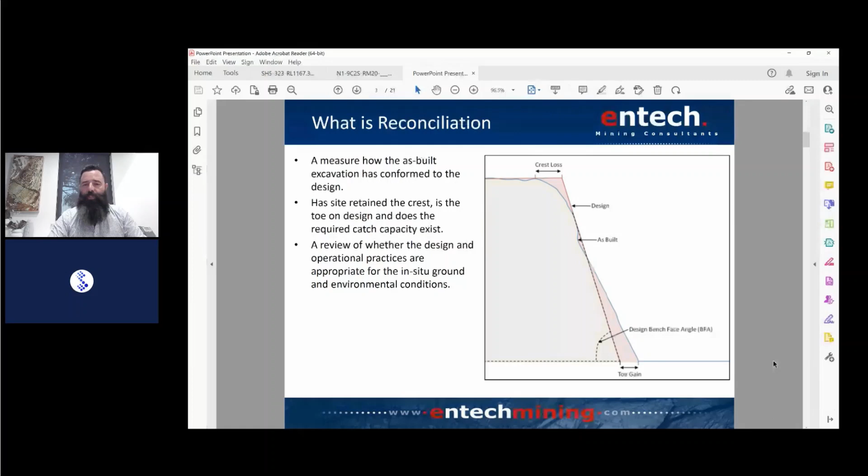Why do we complete reconciliations? So why do we bother with all this work that goes into completing excavation recons? In a generalized form, reconciliations determine if our current practice is acceptable. So from a design perspective, are our design parameters correct? And operationally, do we have the right systems and processes in place to help us achieve that design?

It's a measure to determine if site is achieving the required metrics. For open pit, we're looking at obviously crest loss, toe flare, catch capacity, bench face angle. For underground and vertical development, we're looking at our overall achieved profile, but we're also looking at quality conformance reviews of the installed ground support. So are we looking at the correct ground support installed on the correct spacing in the correct place?

Highlighting these areas of non-conformance also allows us to review the implications that this has on an operation. We can then identify and resolve the root cause and obviously fix what's going wrong and improve what we're doing going forward. So we can quantify the impact of a system, process, or change. I guess a good example of this would be drill and blast. We all know that drill and blast can and does have a significant impact on our final wall profile.

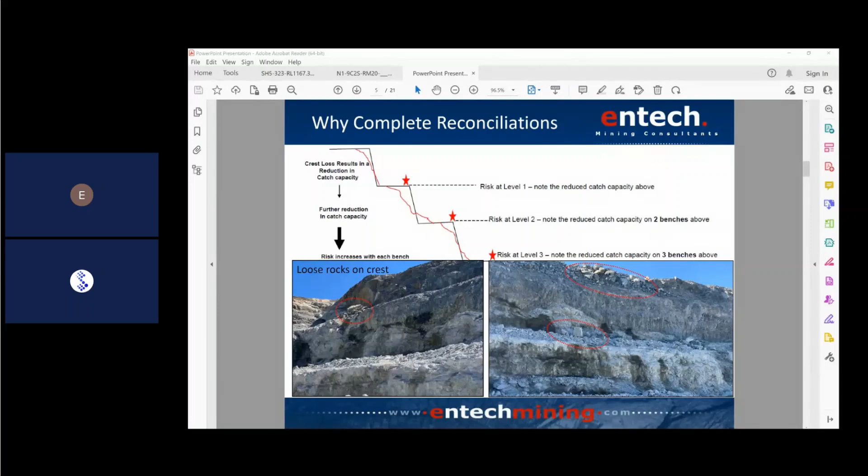So currently, where do we sit? The majority of mines nowadays, fortunately, do collect a high level of data. Unfortunately, only a small percent of this data seems to get used to its full capacity. And one of the reasons for that is actually taking that raw data and transforming it into something usable becomes quite a time-consuming process, and sites and mining operations often don't have the available manpower to dedicate to doing that.

However, when we do use this data correctly, the data will provide value-adding input into decisions and workflow based on mine sites. So the question out of all of this is, how do we get the most out of the data, and how can this inform business decisions moving forward?

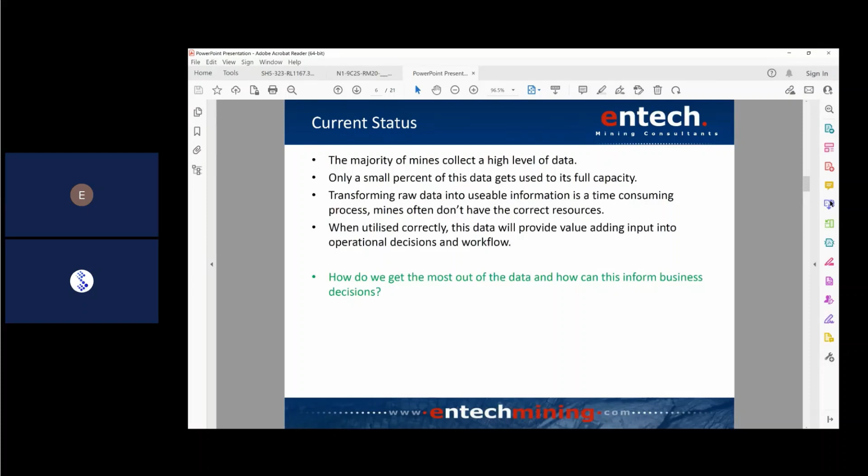Scott, just one quick logistics item. We can't see your video. I think we lost your video. If you can check. All right. No worries, Ravi.

Perfect. And it seems like it is time for poll number 1. So I am going to be releasing poll 1 if everybody can participate. The poll is, what is your current method of geometric reconciliation and pit analysis? You will see it on your screen. We'll leave the poll open for the next 30 seconds or so. Great, very interesting answers here. We'll leave it for the last 15 seconds. Still see some responses coming in. Great, so it's time to close the poll.

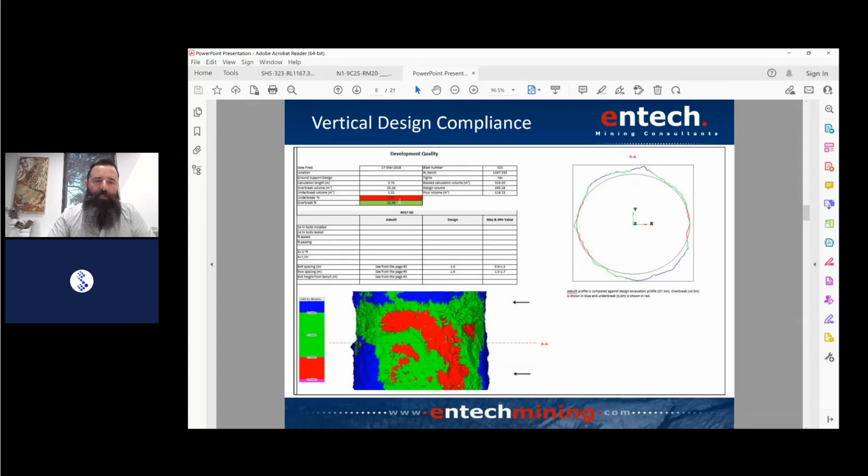So this is a conventionally sunk shaft, drill and blast methodology, and I think the diameter was 7 meters for this. Once the bench was mucked and the ground support installed, the as-built profile was scanned, and what we've measured here is volumetric overbreak as a percentage. So you can see for this section of the 7 meter diameter shaft, our volumetric overbreak was 12.36%.

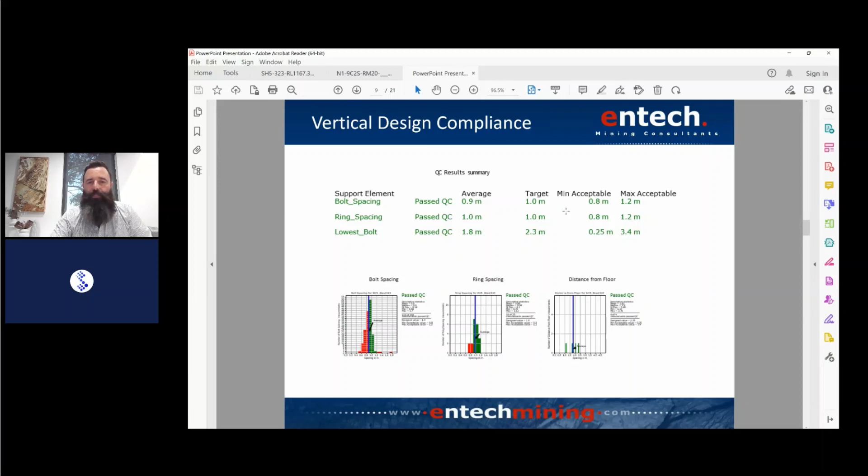And as we scanned after the ground support had been installed, it then allowed us to perform quality control on the installed ground support. So we looked at bolt spacing, ring spacing, and the height of the lowest bolt off the bench floor. We compared that to our acceptance criteria and whether it was a pass or a fail, and any actions needed to bring our design back within our criteria were taken afterwards. So we'd measure the average bolt spacing, average ring, and lowest bolt, and compare that to what we deemed acceptable.

You can see here the image from the scanner. So this has gone through and completed a calculation on every bolt spacing and then also every ring spacing.

That allowed us to continue very accurate quality control on the ground support that was installed. And over to the left-hand side of the screen, you can see an image showing the as-built shaft in comparison to the design barrel. So you can see the green and the blue indicating various levels of overbreak, and the red is obviously sitting proud of the barrel design and indicating tights within the shaft itself.

So I guess one of the important things to consider here is that not only is the actual data collection and the data processing important, but the way in which we convey this information through to operations, tech services, and management is also equally as important. We can collect all the data that we want, but unless we can effectively convey that information, it's not going to get us very far, and it's not going to help us convey the message we want to get across there. I'll just change tabs here, so you should be able to see a change.

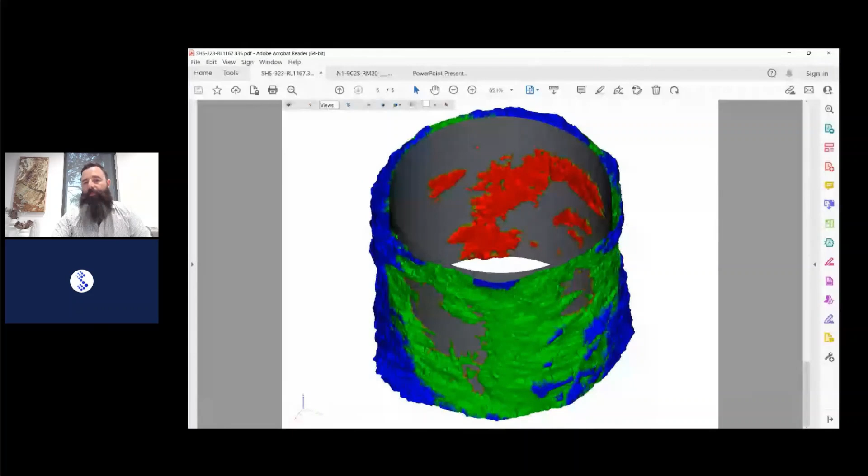Now, part of what we included in our presentations or our reports was a 3D image of the actual shaft profile in comparison to the design. And again, this goes a long way in the actual end user being able to view the data, being able to see that reconciliation in comparison to the design and seeing where we get our overbreak, where we get our tights. As most of you know, with shafts, tights can be more problematic than overbreak a lot of the times, especially if we're wanting to lower steel cans down afterwards.

So this was quite well received, and the fact that people could actually get their head around when we say, right, we have 12.5% volumetric overbreak, what does that physically look like? You know, people can begin to gauge and see in their minds what overbreak looks like.

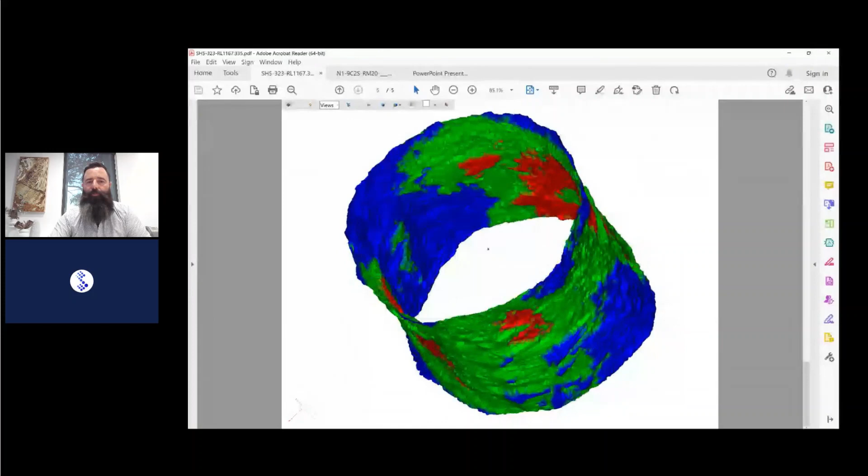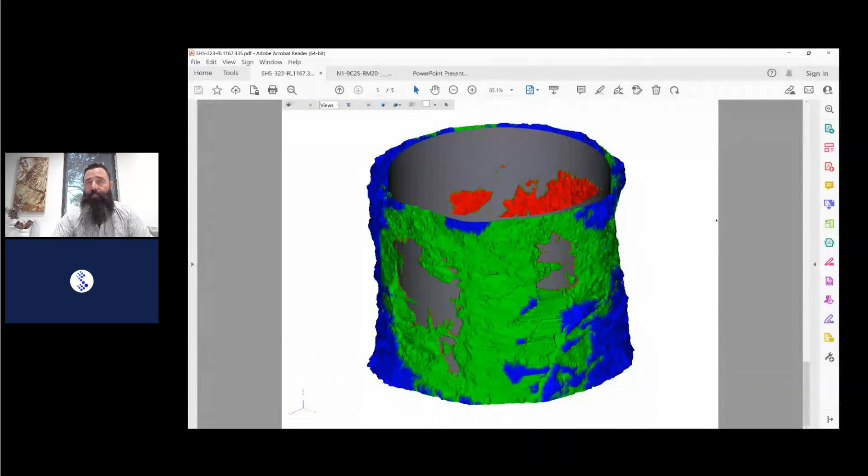Obviously, when we're looking at long-term trends here, we'd overlay this with various lithology or structural intersections. So if we're beginning to see large areas of overbreak, can we also tie this into a change in lithology, a large-scale fault or shear zone coming through, or has there been a change to the drill and blast practices? Is that why we're suddenly seeing tights on the northeast wall?

Stepping back to the original presentation. But the same style of data collection and report processing for underground design compliance. So obviously once we've bogged the heading and scaled, we would go down and complete a scan of that face. Now, one important thing to note here is that not only do we scan the heading as it is, but that scan also picks up the previous heading. So we pick up the exposed face, and then we pick up the ground support that's been installed, so the mesh, bolts and fibercrete behind us.

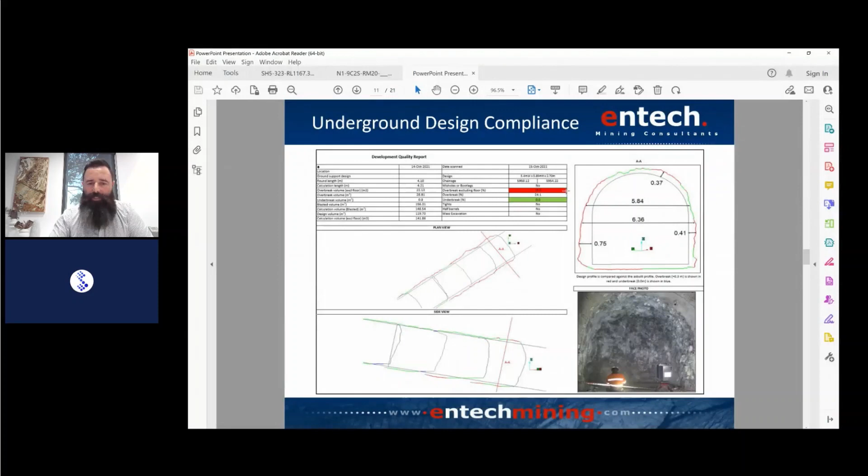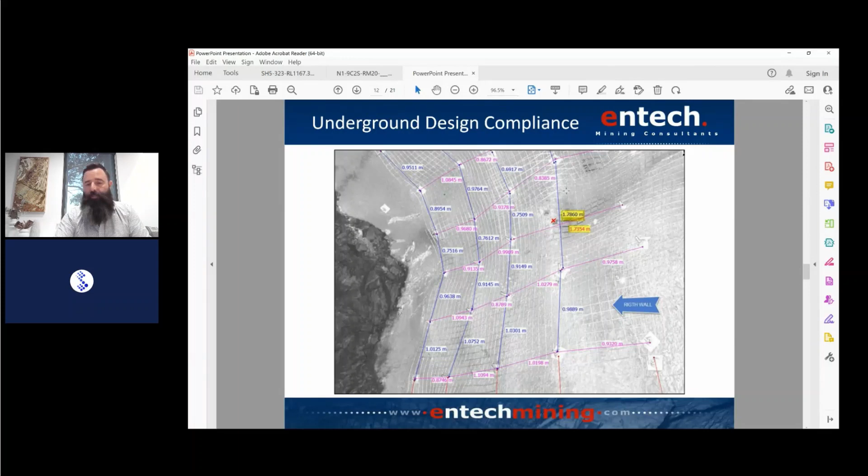And that then allows us to complete quality conformance, again, like we did with the shafts, but in underground lateral development. So here we're saying we've got 18.5% overbreak, so that's volumetric percentage. This allows us to go back and calculate the spacing on bolts and the ring spacing. So again, assessing these metrics against site-specific acceptance criteria and say, right, is our bolt installation to specifications, or do we need to remedy and issue a rehab plan?

Looking at this, the image on the left-hand side is the fibercrete layer. So obviously, like I said, we picked up the bare heading, and then once we've applied the fibercrete and we scan behind us, that then picks up the installed fibercrete. Yellow is underspray, blue is overspray, and green is on design, plus or minus our acceptance, which is very handy. Obviously, if we're looking at our fibercrete installation, it's a significant cost. It's also a significant time to spray and then wait for it to cure.

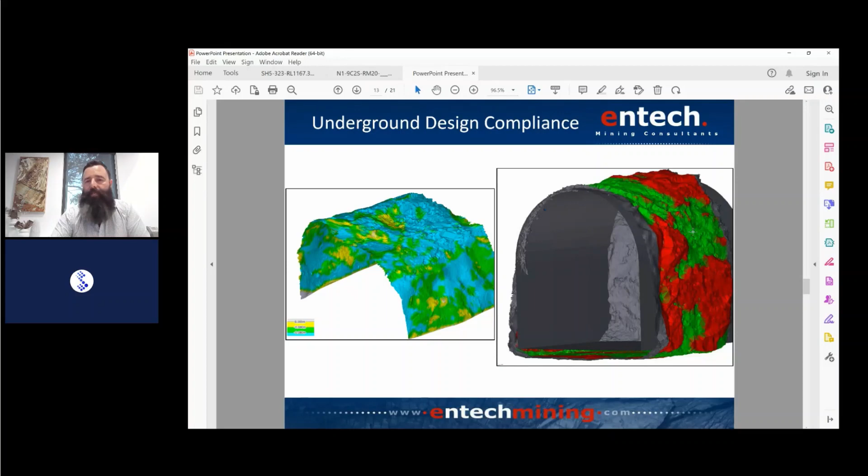So if we can look at a heading and say, right, for the last 3 cuts, we've oversprayed the right-hand shoulder by 50 mil, why is that? That could equate to 3 cubes, 4 cubes worth of spray going up that we don't have to install. Or conversely, look, we're underspraying the floors. We need to get back in, put up another spray to bring everything onto design. And our right-hand image here, again, as we were looking at previously, is a pure as-built versus design. So we're looking at the as-built development versus a design profile.

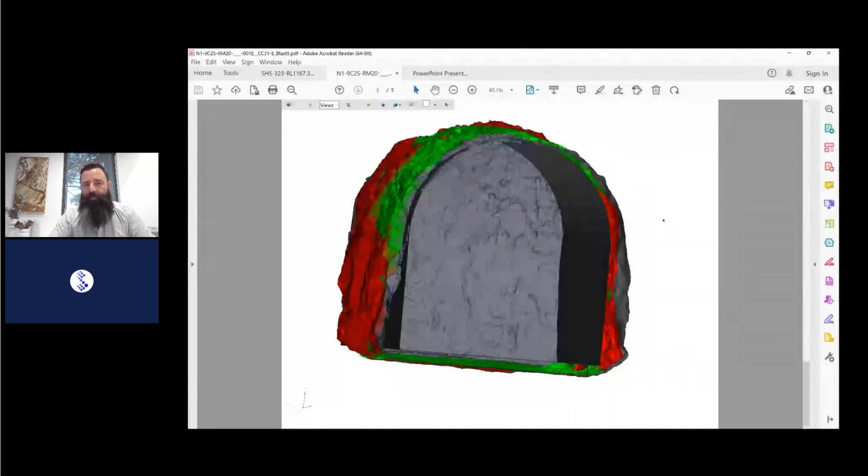And as part of that reporting process, also issuing, like we did before, a 3D image so that the viewers can sit there and say, right, the geotechs have sat down and said we have 20% overbreak in our left-hand shoulder. What does that physically look like? And just bringing people on board and bringing people along for that journey, I suppose, goes a long way to getting the changes implemented that you need.

There was a dedicated data processing team which would take the scan data and calculate the overbreak and the ground support QC. They would then issue the reports as we just discussed, and then on a daily basis we would sit down with drill and blast, engineers, tech services, operations, and the geotechs and discuss the results. And obviously any issues that we highlighted, any areas of overbreak or underbreak or any developing trends, we would investigate and actions were put in place to correct any outstanding issues.

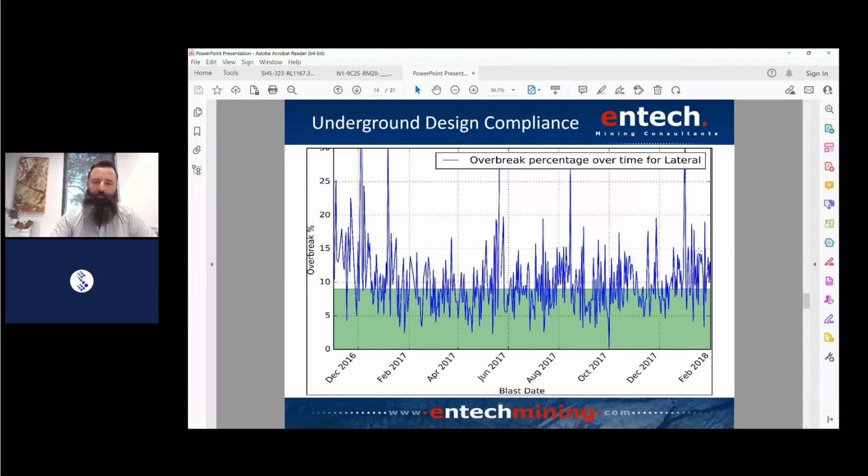I guess as a run through, that covered vertical developments and underground developments, and various reconciliation methods that I've employed in the past. And now looking back at open pit and the more traditional methodology that's been used to complete the open pit reconciliations, one of the things you first notice here is the quality of the actual open pit scan or the pickup itself. So not the greatest quality. You can see large spacing in between individual points on the pit shell.

And also, I know on this example that a lot of toes were picked up and just projected up to form the crests. So you can also ask what was the point in doing a reconciliation to start with, and it's a valid point. But the process I went through at the time, you can see we went through and manually sectioned. In this case, the wall, we had 58 sections, and I reviewed 29 of them. So I went through and reviewed half of them based at 10-meter intervals. So even the intervals that I did examine are spaced far apart, not the close proximity of data that we would really require or that we would like to see.

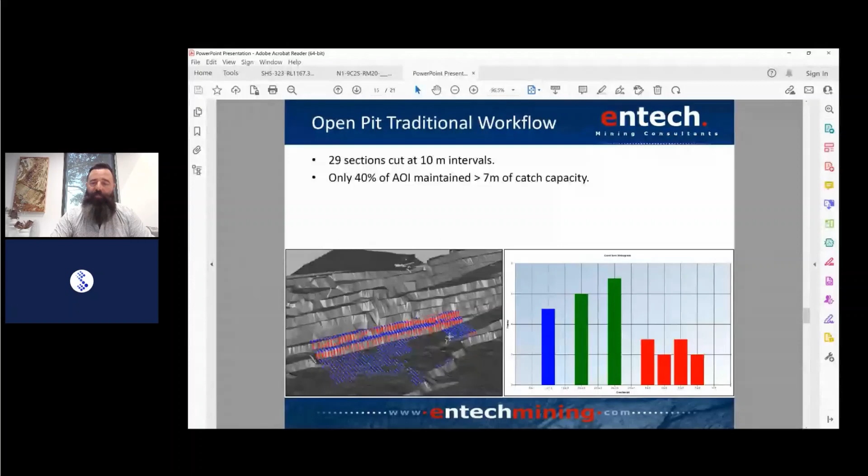And what did that tell me? It told me that 40% of my area of interest had greater than 7 meters catch capacity on the bench. So a lot of work and a lot of time went into that, a lot of sections, a lot of manual work. And the data I got out was good, it was fine, but it was fairly limited in what I could get from it. The whole amount of effort that went into it wasn't very rewarding as far as the data that I got out of it at the end of the process.

Still looking at the open pit recons from a traditional sense, again, the same style of data that's captured. We're just looking at crest loss here, and the amount of crest loss is broken down into half-meter intervals: good, moderate, poor, and very poor. So again, it's good data, and it does tell us information on a very specific data set, but the accuracy of this is determined on the quality of the pit pickup, which in my previous example was very poor, and on how closely spaced I've cut my sections. So if I'm cutting them at 10-meter intervals, we're not really getting that proximity of data that we'd want to see.

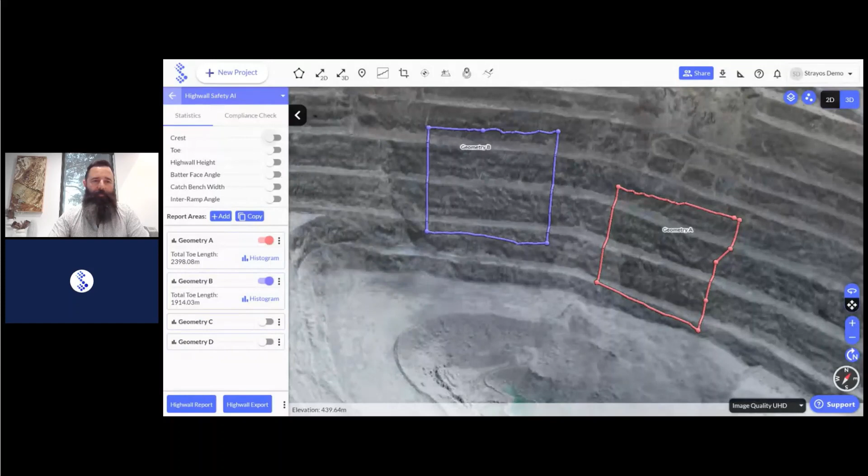Right, so this was a drone pickup from a site in Western Australia. That image has been processed and the AI generation has gone through and picked up the crest and the toes. So we've got the crest coming in as orange and the toes as yellow. I'll zoom out a bit so you can see the full impact of the pit.

And I've since then gone, just as a time saver, and created 2 areas of interest. So you can complete any reconciliations on the pit as a whole, or if there's areas in particular that you want to focus on, by simply adding a polygon, you can create any of the geometries. I've created geometry B and geometry A here, which will then allow us to focus our recons on these 2 areas.

So if we want to look at high wall height, actually, once the imagery has been uploaded and processed and the AI has gone through and recognized the crest and the toes, it's critically important to also go through with a set of eyes and validate what it's picked up. Every bit of analysis that's done from this point forward will be based on the current pickup of the crest and the toes. So you always want to go through and make sure that what it is identifying as crest and toes are actually accurate.

What we can do here is bring in the projected high wall height.

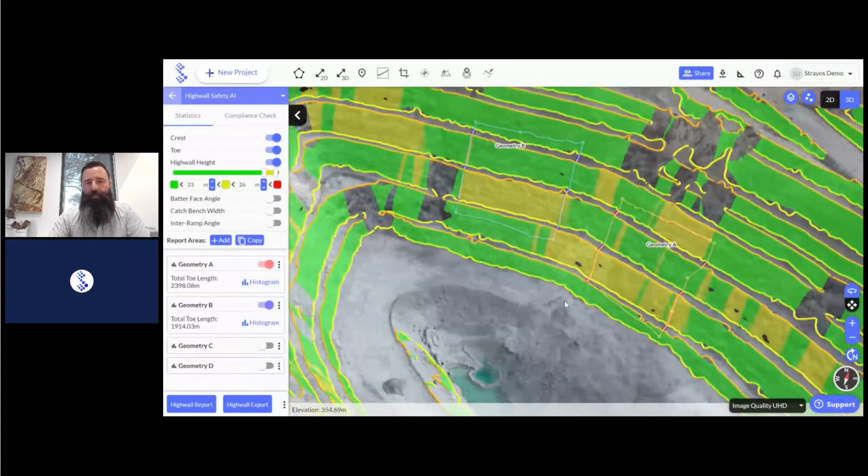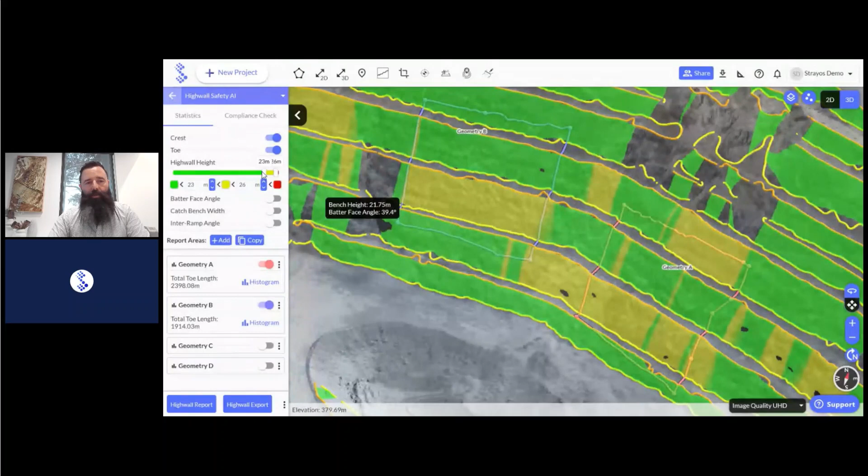We'll now look at bench face angle. So again, toggle on bench face angle. And here, anything under 57 degrees, or anything flatter than 57 degrees, is highlighted green, and yellow sits between 57 and 63. Again, if I want to change that, I can do so very easily just by sliding the toggle on the left-hand side to identify any areas of concern.

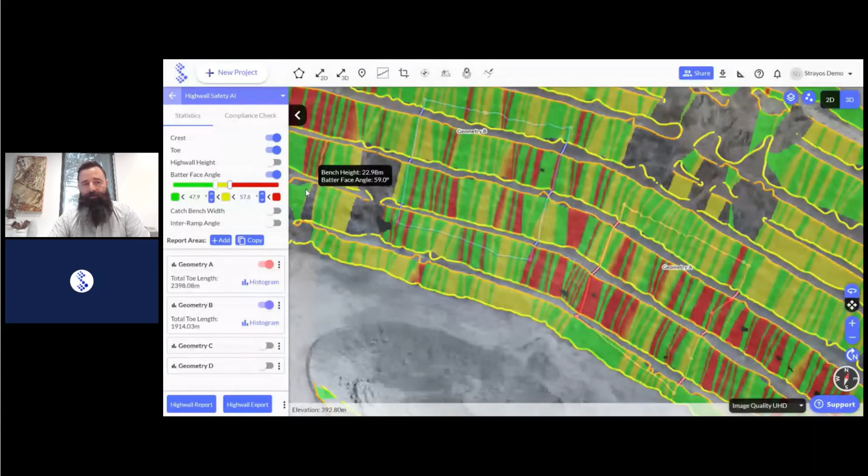If we then want to look at catch berm width, so we've looked at our batter height, bench face angle, and now we're looking at the width that we've actually achieved on our catch berms. Again, toggling through, if we're concerned, anything under 5 meters should be highlighted red, that's what you've got there. So depending on what our site requirements are and what our individual wall designs are, it's an easy way to visualize what we've got. When you compare that back to the manual reconciliation open pit process that we looked at previously, I did this in a fraction of the time it took me to do the manual work.

Now, the beauty of this, obviously, the processing is one part of reconciliation, and setting up the metrics that we want to review. But then also report generation, so we can distribute that report to site, plays a massive part. So down here, if I click High Wall Report, that will auto-populate a report showing the key characteristics and the key statistics based on what we have. So this is the automatically generated report style coming out of Strayos Geotechnical. It gives us a 2D and 3D image for all of our metrics. So for example, this is high wall height.

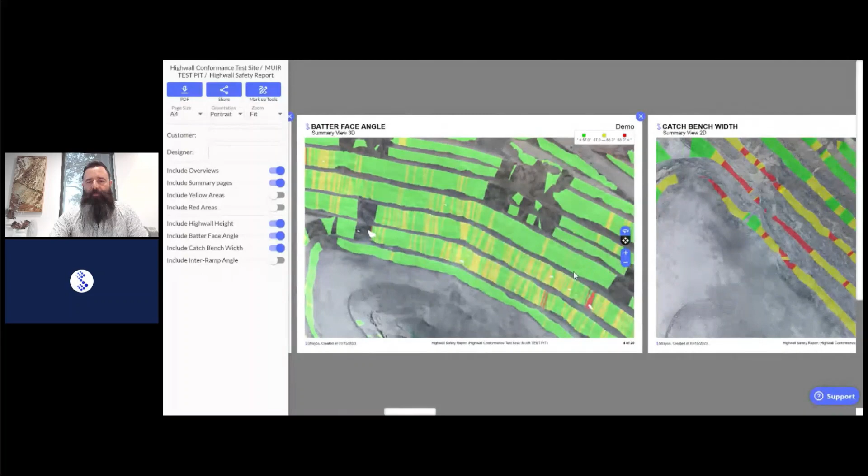So obviously we can edit and customize what we want to be in this final report. So we can change the orientation of our 2D view and what we want to see in 3D. So this is high wall here. And if we step through to bench face angle, again in 2D, we can orientate this to whatever we want to focus on, if we want to zoom right in. And then our bench face angle again, we can zoom in for presentation purposes. Same with catch bench width in 2D and 3D.

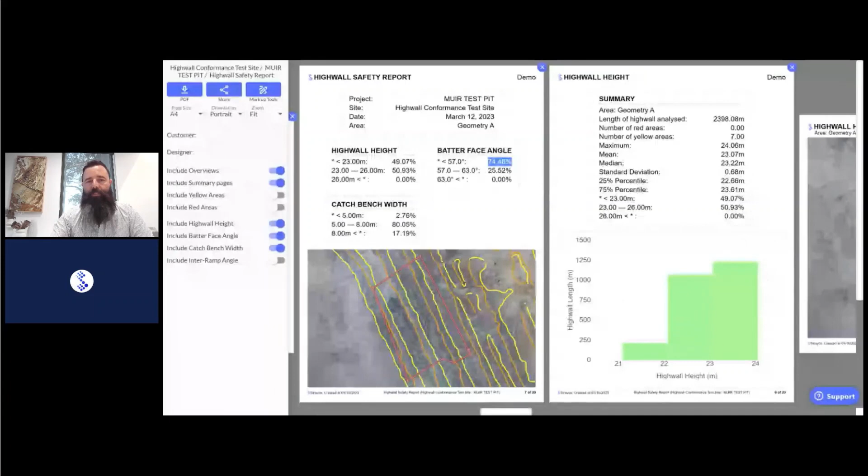Now this then comes to a summary report and breaks down our 3 key metrics that we've measured here: highwall height, batter bench face angle, and catch bench width, and gives us our statistical breakdown on our 3 metrics. So if we're looking at bench face angle, inside our geometry A, so inside our first box that we created, our area of interest, 25.5% of our walls sit between 57 and 63 degrees, and 74 or 75% of the walls sit less than 57 degrees. And these metrics are controlled by what we set up previously when we were playing around with the toggles on the processing page.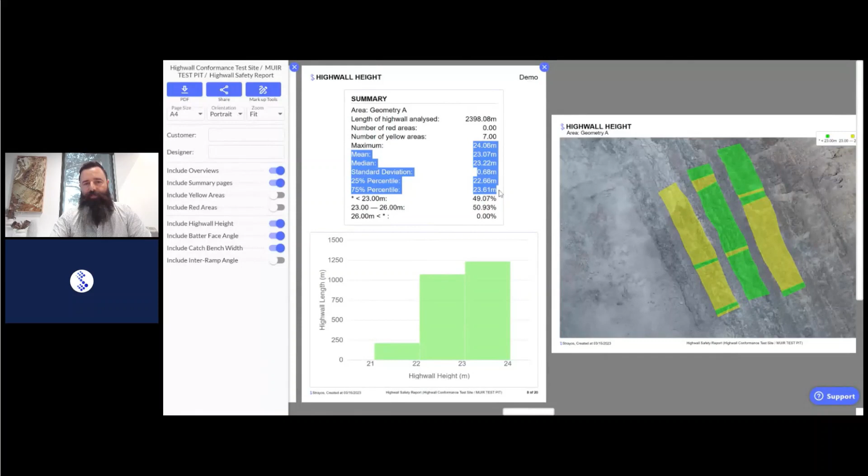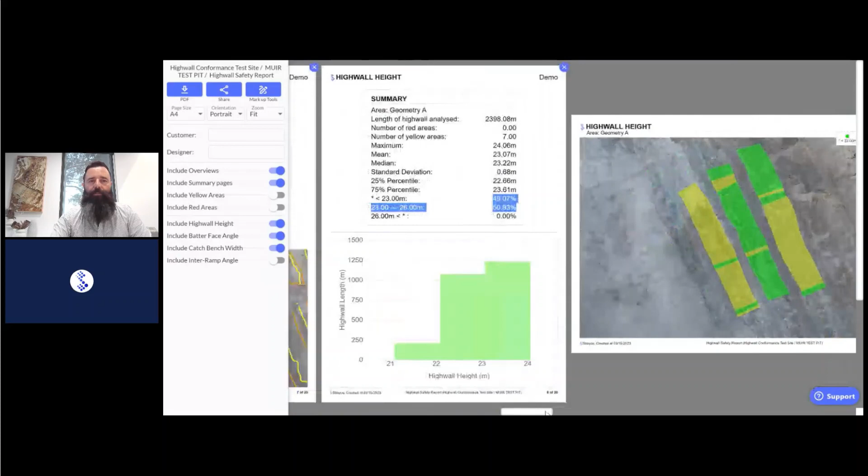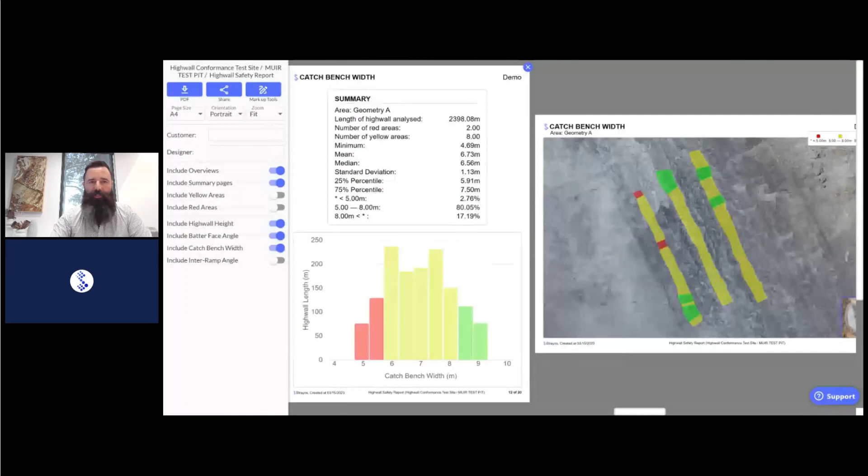We then go into a more detailed statistical review of each of the 3 metrics: highwall height, face angle, and bench width. So we've got a breakdown on our maximum, mean, standard deviations, 25th, 75th percentile, and again, the percentage that we've achieved for our different wall geometries, and showing this in plan view. So that's highwall height. We step through into batter face angle, and then catch bench width as well. So basically all the metrics that we needed to know have been included and broken down in this reporting function. This will then also carry on for our geometry B, or as many areas of interest as we populate, to be honest.

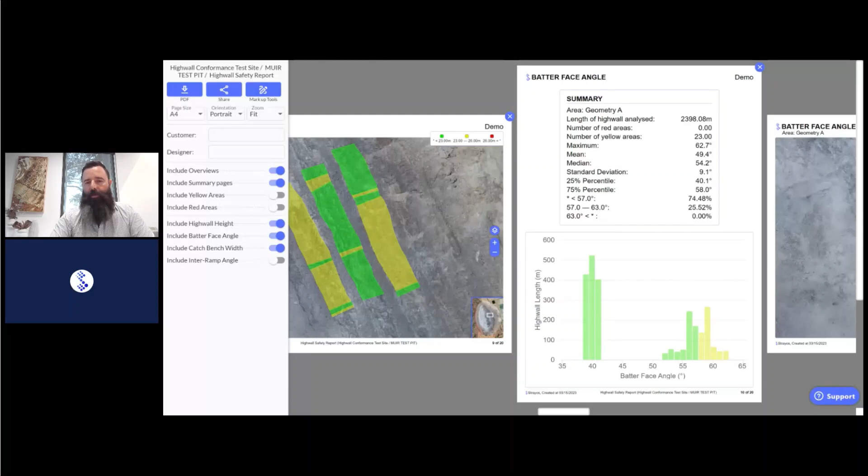So that gave us a brief overview of our 3 primary metrics and what we've actually got in situ. Now, what we also want to do is complete a compliance to design check. So that didn't tell us how much crest we've lost, what our overall compliance to design is, or anything along those lines. What we can do here is upload a DXF of your pit shell, so of your design, and the intent is that we compare that design to the actual as-built and actually get proper crest loss, toe flare, compliance to design on our berms, and what our catchment capacity sits at.

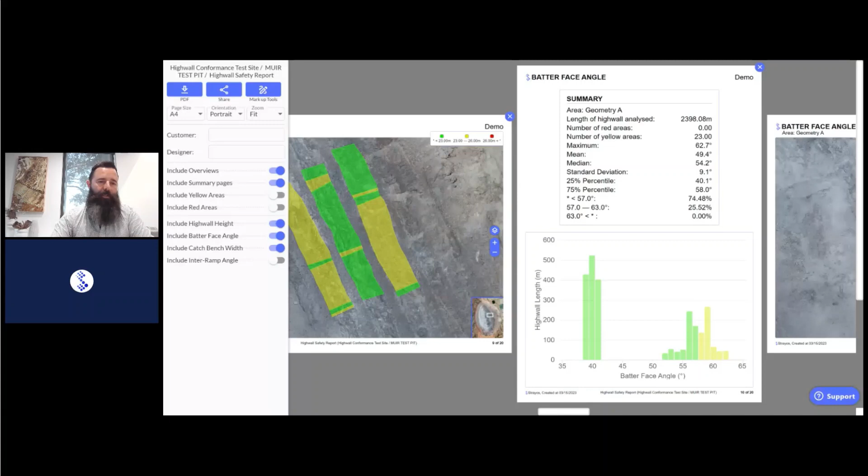So I've already uploaded our design DXF. We can obviously turn that on.

Yeah, I think the other screen is not showing. There, yeah. Thanks, Ravi.

So we can turn that design DXF on and off. I'll leave it off just for visualization purposes. But now when we run crest loss or toe flare or berm compliance, it's actually measuring the difference between the design versus the open pit. So if we wanted to look at crest loss, for example, it's probably in the 2D view, yeah. It should be right now.

Yep. So here we're actually measuring the crest loss. I'll just change that. Anything under 2.5 meters here, crest loss we can see is green. Anything from 2.5 to, change that to 5 meters, is obviously indicated in yellow. And anything above that is indicated in red, which is not in this instance. So previously we were looking at what we have in the ground, and now we're reviewing our compliance to design.

The same can be said for toe flare. So if we want to see where that toe sits in comparison to the design, is our toe sitting proud? Is it behind the design? So we can obviously zoom in here and say, right, in this instance, everything is sitting proud of the design. There's nothing behind the design.

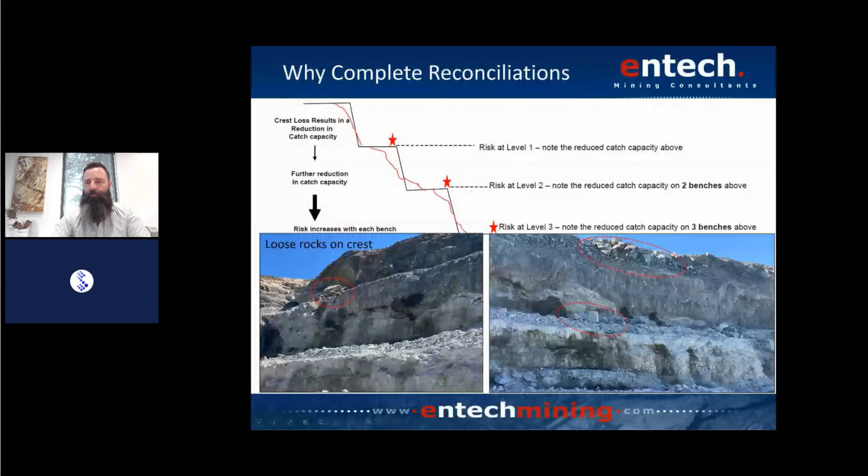Just reshare. Can you see the PDF, Ravi? Not yet. It's pulling up now. Now I can see, yeah. No problems. Perfect.

So I guess in summary of all of this, most sites know anecdotally, but there's rarely much data and metrics around to support this, about how much overbreak or how much underbreak they're getting throughout the walls. So every site you go to says, yes, we're getting a lot of crest loss. We know we're getting more crest loss on our eastern wall than our north, but not a lot of sites can actually put hard data behind this to support a change in drill and blast processes or a change in wall orientation when we're intersecting a certain amount of structures.

So to be able to take this data that we collect in the field, process it and produce the reviews that we need, in a fraction of the time compared to what we've historically done is a massive improvement. I guess the key outcomes are not only to improve safety and compliance to design, but feed back into that design loop where we can actually add true value to site. We can save money on sites and we can improve schedules.